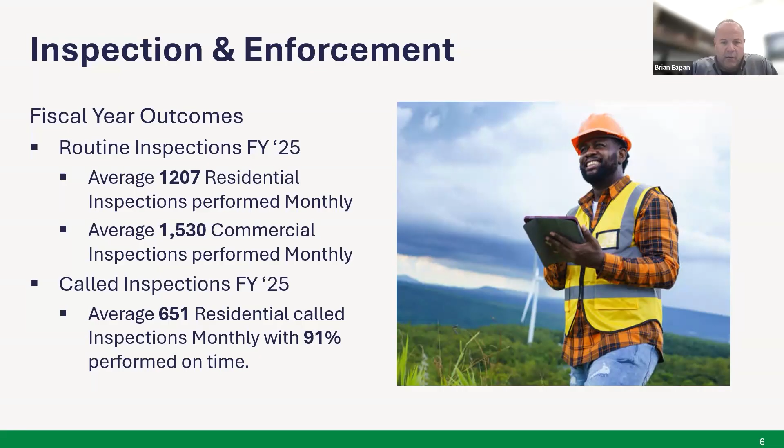We averaged about 651 inspections on the residential side, with 91% of those being performed on time within 72 hours of the call date. Next slide, please.

Same thing for the called inspections on the commercial side. We have a larger team on the commercial side. We're averaging 27 called inspections. You can see it's not as large a volume on the called inspections, so we were able to hit 100% of those on time.

Pre-construction meetings, again, we view that as a priority as well. So we're able to hit 100% of those pre-construction meetings on time, which are performed within 72 hours of the date that inspection's scheduled. Enforcement of non-compliance, I mentioned previously, the enforcement team handles the 311 complaints that come in, all the service requests. We average 117 complaints per month, with 99% of those performed within 24 hours.

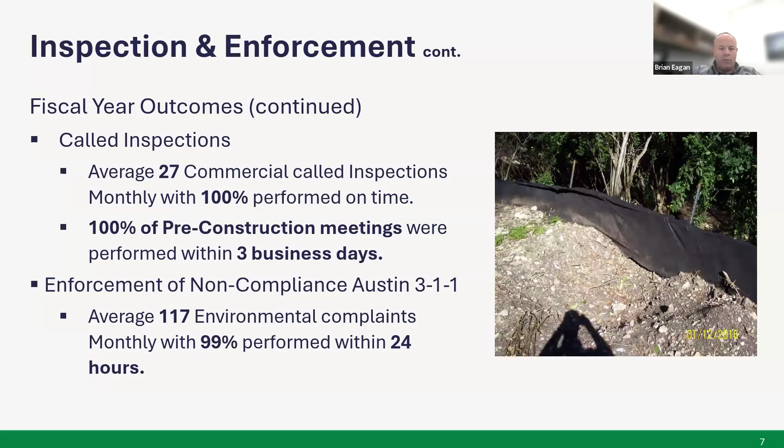That 24 hours is an earmark we have, but I can tell you 99% of those are generally performed where an inspection is conducted with eyes on that site within 2 hours of receiving that complaint. Next slide, please.

As far as community engagement and improvements, our division offers lunch and learns that are open citywide. Some of those topics are enforcement actions. We speak on residential inspections, commercial inspections, and we've also included boat dock inspections. Those lunch and learns are conducted here at the PDC, the Permit Development Center, on Wilhelmina Delco Drive. ESIS can provide that address if you're interested, and a link to those courses later in this series.

We also provide digital and physical literature to stakeholders, including builders, property owners, developers, anyone looking for educational material or who has questions. We conduct meetings and presentations after hours with homeowners associations and neighborhood associations, focusing on environmental inspection processes, compliance, and environmental stewardship. We will come out to your location and meet with property owners at one of their meetings to provide education and hold a question and answer session.

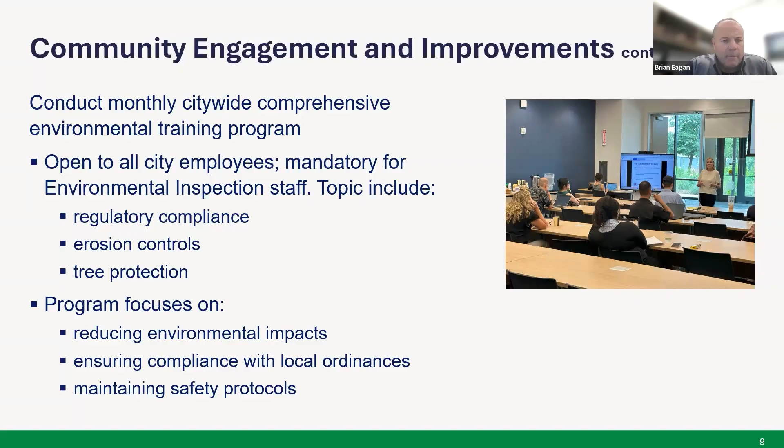So at this time, I'm going to turn this over to Scott Cochran. He's the division manager. He'll introduce himself for residential building inspections. Appreciate everyone's time today. Thank you.

All right, thank you Brian. Hello everybody, thank you for being here. My name is Scott Cochran, I'm the division manager for the residential building inspections group. What I want to do today is run through, and I have a lot to share so bear with me, but get you familiar with the IRC, what it covers, and really basic overall inspection processes and what we're looking for during our inspections. This is a really basic overview. Obviously every job is different, but this gives you a good idea of how everything should work in a flow. Next slide, please.

So we currently operate under the 2024 International Residential Code. That code is developed by the International Code Council. It really outlines the minimum requirements for construction of one and two family dwellings and townhomes as well. Those code cycles are updated every three years, depending on different variables. That doesn't mean we update or adopt a new code every three years, but the codes are updated every three years.

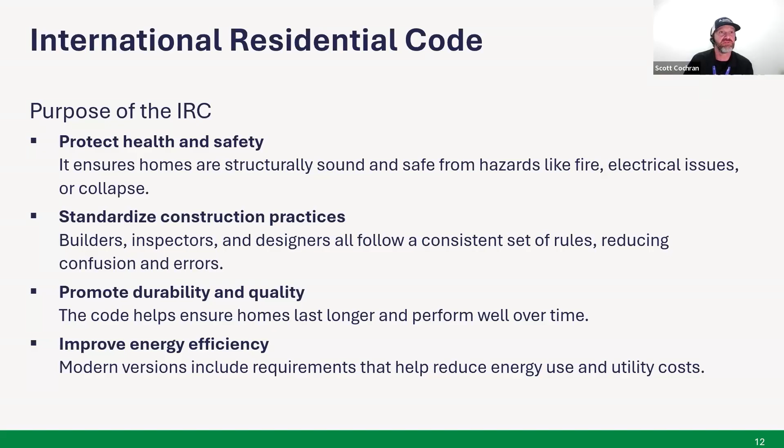So the purpose of the IRC is to protect the health and safety of occupants and future occupants. It's also to help protect our first responders. It ensures homes are structurally sound and safe from hazards like fire, electrical hazards, or collapse. It standardizes construction practices - builders, inspectors, and designers all follow a consistent set of rules, reducing confusion and errors. It promotes durability and quality - the code helps ensure homes last longer and perform well over time. Also, energy efficiency is a big thing - modern versions include requirements that help reduce energy use and utility costs. Next slide, please.

As I mentioned in the first slide, buildings covered under the IRC would be single-family homes, two-family homes - you can call them duplexes - buildings consisting of three or more townhome units, and all buildings within scope of the IRC are limited to three stories above grade plane. Next slide.

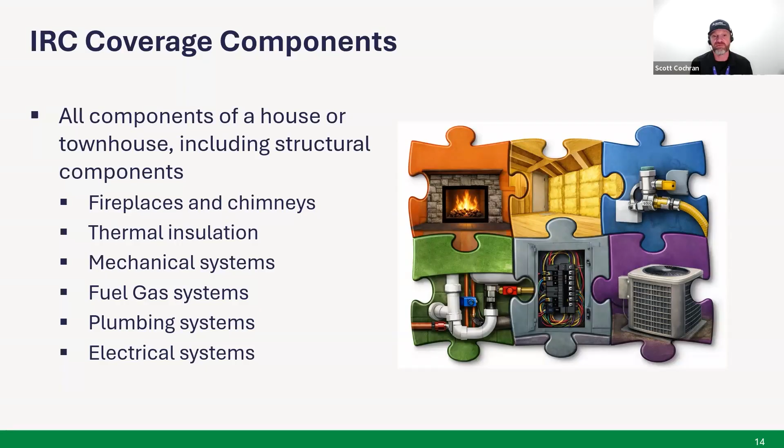The IRC coverage components - there's a lot in the IRC, it's a nice thick book if you've never seen one before. All components of a house or townhome, including structural components. It goes over, in a general sense, fireplaces, chimneys, your building envelope, thermal insulation, mechanical systems, fuel gas systems, plumbing systems, and electrical systems. Basically any and all things in and out that run throughout your house - the heartbeat and the veins. Next slide.

So the purpose of inspections - not everybody likes to pull permits, but there is really good reason to do so. You get an overall view and check of structural integrity, load path and bracing rules, fire-resistance requirements, egress and access requirements for your occupants and first responders. This isn't just for the occupants, it's also for first responders to make sure they have proper openings and stairways tall enough or wide enough for them to be up and down with the building apparatuses. Overall life safety requirements is really key, and that's what we really try to focus on.

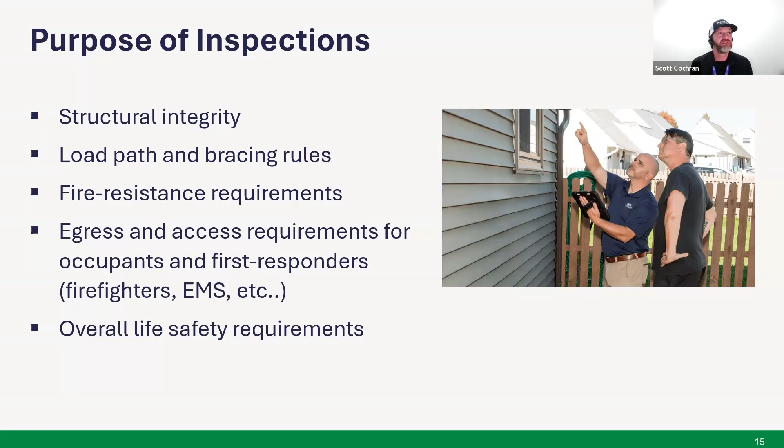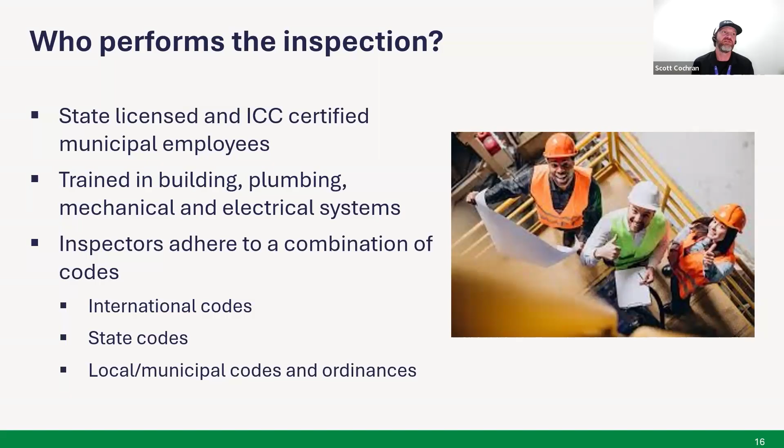So who performs these inspections? When you have an active permit, as far as the city goes, you've got your city inspector who is state licensed in plumbing and other endorsements, but also ICC certified, with the hopes of being a combination inspector certified in building, mechanical, plumbing, energy, and electrical. Inspectors adhere to a combination of codes - international codes, state codes, and local municipal codes and ordinances.

So I wanted to run you through, when it comes to a building permit, a basic overall general sense of the number of inspections there are, but more importantly, what flow they should operate in. One that's not on here, and that's my fault, I didn't add it - the first thing, for the most part, that will occur, especially if you're in an infill area, is going to be a 619 environmental pre-con inspection.

After that, you'll have a layout inspection. At layout, we're going to be identifying that your forms are set. You'll need a form survey uploaded to the building permit. On that survey, we'd like to see setbacks - we want to make sure you're not encroaching into a building line. If there's an overhead power hazard, which a lot of infill lots do have, we'll sometimes ask to get a measurement to make sure that structure's got the proper horizontal clearance from that overhead line. If you're in a floodplain, we want to see the FFE, finished floor elevation, to make sure you're elevated high enough above flood requirements, FEMA requirements.

A foundation inspection - we do not conduct foundation inspections. We depend on a third-party engineer to do those inspections. They'll inspect it prior to pour, and once that's done, they'll upload their letter stating the foundation was poured to code requirements and specifications.

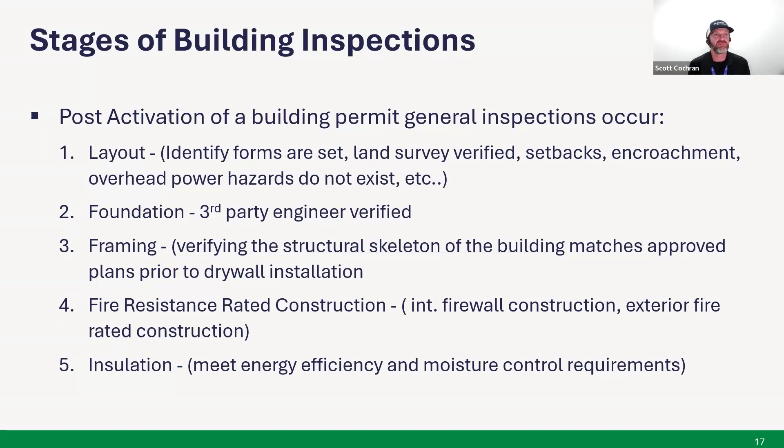So you move on to wallboard after that once you've gotten your approval. For new construction, it's third-party verified. For remodels or additions, more than 128 square feet removed are inspected by a third party or a residential building inspector. So the important thing is, if it's a remodel of 128 square feet or more, you have the option of either hiring a third party or asking the city inspector to schedule your wallboard inspection and do the inspection. However, all new construction is going to be done by a third party, ICC certified, or a certified design professional.

The termite inspection will be next - that's just going to be a third party. Your termite treatment company will essentially give you a HUD 99B form or a State of Texas wood destroying form. They'll fill that out and give it to you or the builder, which then needs to be uploaded to the building permit. We'll verify that all the areas of the home were treated, the address matches, and it's a real quick paperwork inspection. We'll verify everything matches and pass that inspection. Then you're on the final building.

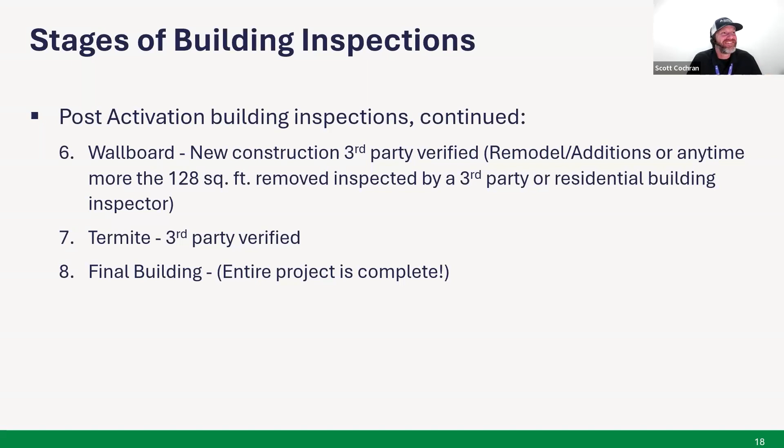Stages of mechanical inspection, specific to mechanical permits only. Basic overview: if this was a new construction permit, there's really only two things we're looking at. Mechanical rough inspection is done with the framing, covering HVAC and ventilation systems before they're concealed. We're looking at the ductwork, making sure R values are correct, your vent hood if installed already, and your exhaust ducts for utility rooms and bathrooms, making sure they terminate to the outdoors. All minimum code requirement things.

And then a mechanical final, we'll see you again for a grouped mechanical final, building final, plumbing final, and final energy. HVAC and ventilation systems fully installed, operational, and safe prior to occupancy.

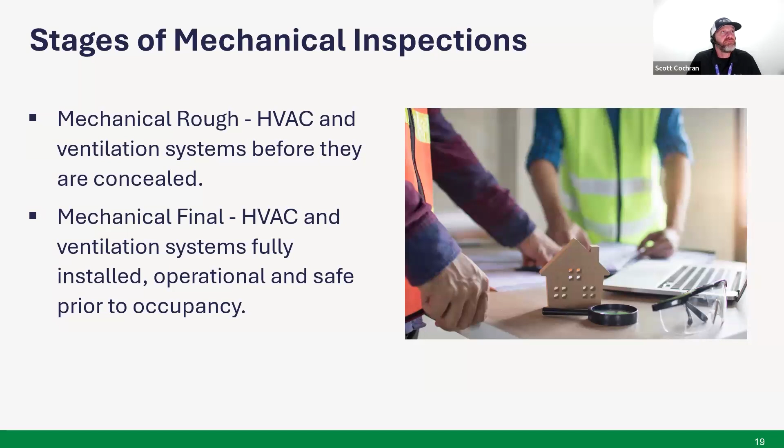Specific to plumbing permits, throughout the construction process we're going to do a plumbing rough inspection. That's verifying your drain, waste, and vent systems are installed prior to concrete, to code. Plumbing pre-pour as well, drain, waste, and vent, we're looking at that again. They should be on test along with your water supply lines, and we're going to make sure those are all installed prior to placement of concrete.

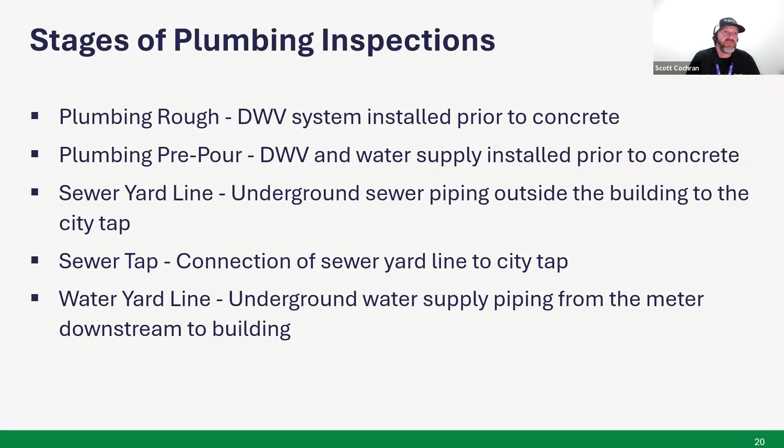Sewer yard line inspection, that's your underground sewer line that will connect to the city tap. Sewer tap as well, we'll be looking to make sure that sewer yard line is connected to the city tap properly. And then your water yard line inspection, that's your underground water supply line coming from Austin Water's meter up to the building. Make sure it has proper depth and the installments are essentially to code. There's a few different variables that go into that.

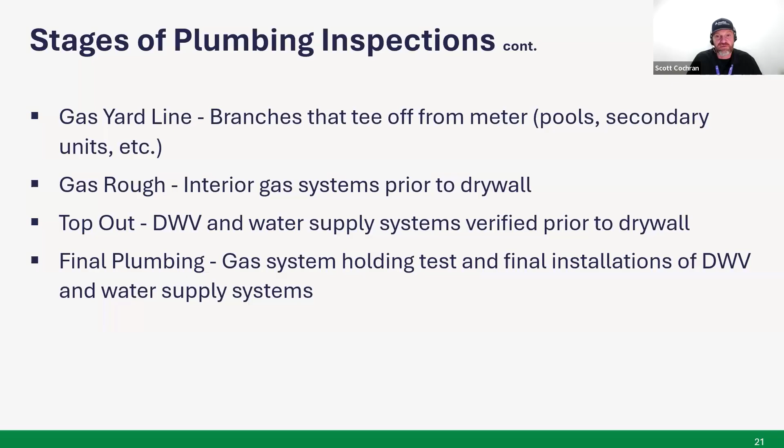And then in final plumbing, we're looking at your gas systems holding the test, and we're looking at all your interior installations being to code, such as your P-traps, and you have hammer arresters for your washing machine. There's a lot that goes into it, but just a basic overall sense that everything is holding and it's safe for occupancy.

Stages of electrical inspections. Actual electrical slab is your underground conduit, so anything ran underground. Electrical grounding is the grounding electrical system installed safely prior to concrete. Your electrical rough is going to happen before your frame group inspection, and that's essentially looking at electrical systems installed in the walls, ceilings, and floors, anything prior to concealment.

And then we're going to see you again at final electric, making sure the system is complete, safe, and the building is safe for occupancy at that point.

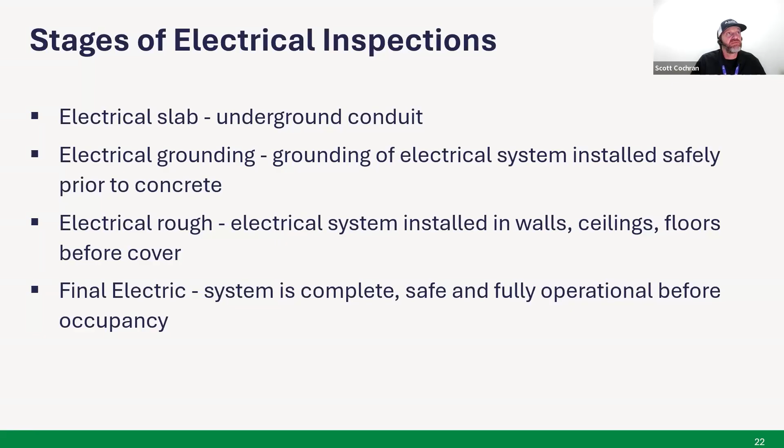The Building Criteria Manual online is another great resource to utilize. You can do a quick search engine, Google, Bing, whatever you want to do, and type in City of Austin Building Criteria Manual—probably one of the first one or two links that pop up. If you go to section 4.6.0, that'll give you a really good sense of inspections from start to finish, including what they look like and what content we're looking for.

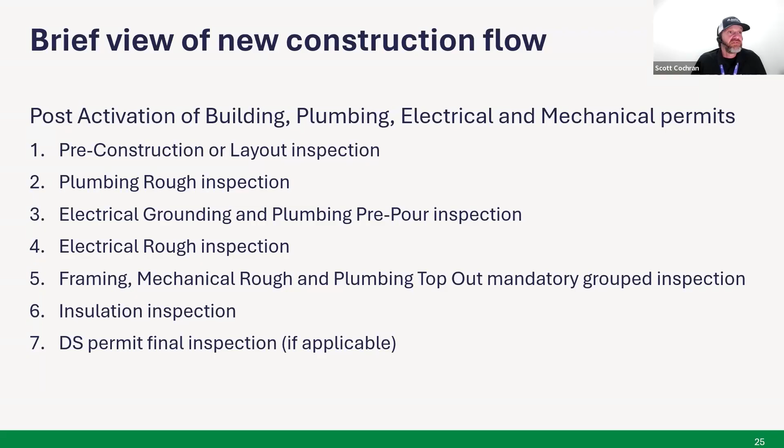Once the DS permit has passed its final, the final electrical inspection has been done. There are one-time inspections: if it's new construction, most likely you're going to have a 611 water tap. You can find that information on your permit, listed under one-time inspections. If applicable, there may also be an Austin Water or an AFD fire inspection—whether it be a WUI or a final sprinkler inspection—and of course your final environmental inspections.

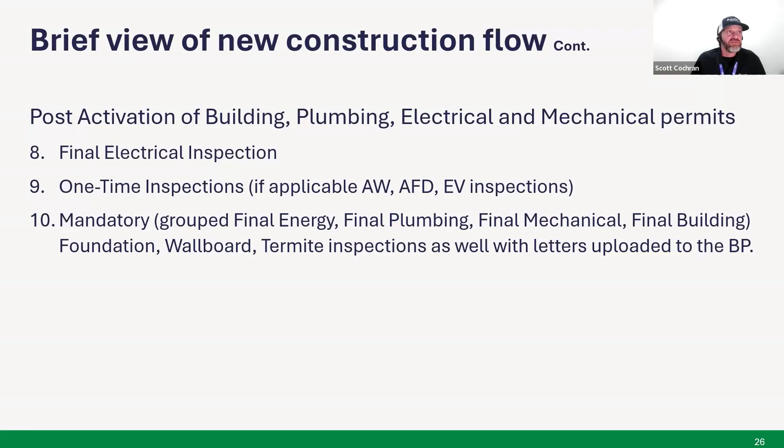Once all of that is done, we'll do a mandatory grouped inspection at final: final energy, final plumbing, final mechanical, and final building. And if you haven't done so already, you'll schedule your foundation, wallboard, and termite inspections along with it—just make sure those applicable letters are uploaded to the building permit.

Just some real quick common failure items I wanted to share—some top 10 things we see. Addresses not posted on site: if we pull up and don't see an address on a building, whether spray painted on the foundation or marked some other way, we don't know we may exactly be at the right place. So that's actually grounds for a failure.

Also, city approved plans on site. One common thing we see is if it doesn't have our city approved stamp on it—whether the original stamp or a photocopied stamp—we technically don't have the proper documents to conduct the inspection. A lot of what we see is non-approved architectural prints being there; those may be the same set that are approved, but if they don't have the stamp on them, we simply can't do the inspection.

No access—so no code, no lockbox code left for us. There were no instructions left online as far as the lockbox code, where to enter, who to call, and so on. Also, deficiencies previously noted not corrected prior to rescheduling.

If there's a list of 6 or 7 deficiencies, it's not uncommon for us to show back up. I'm not sure if the job's not getting walked before it's rescheduled. Who knows? There could be a number of different variables. But it's always important to try to get the subcontractors to correct those items before calling the reinspection back in.

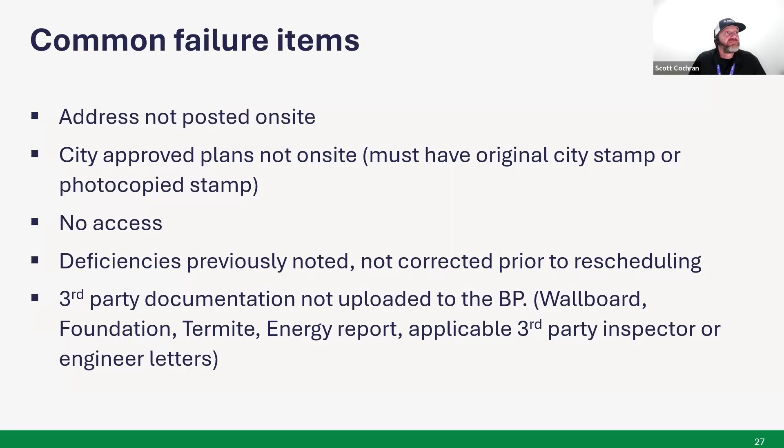Prerequisite partner department inspections not passed. For example, if you're in a WUI area, new construction, before your frame group inspection can take place, you're required to have your initial WUI inspection done by Austin Fire Department. Similarly, at final, you're required to also have your fire final done prior to scheduling your final inspections. Same thing applies for environmental and Austin Water. So just be cognizant of your prerequisite inspections, and if you're not familiar with what those are, visit our flow chart online.

Grouped inspections not scheduled correctly. If it's a group final, there could be a prerequisite Austin Water inspection that hasn't been done yet. That is going to prevent you from scheduling your building final, but you're allowed to schedule everything else systematically. If we don't see them scheduled together, it's most likely going to be an automatic fail.

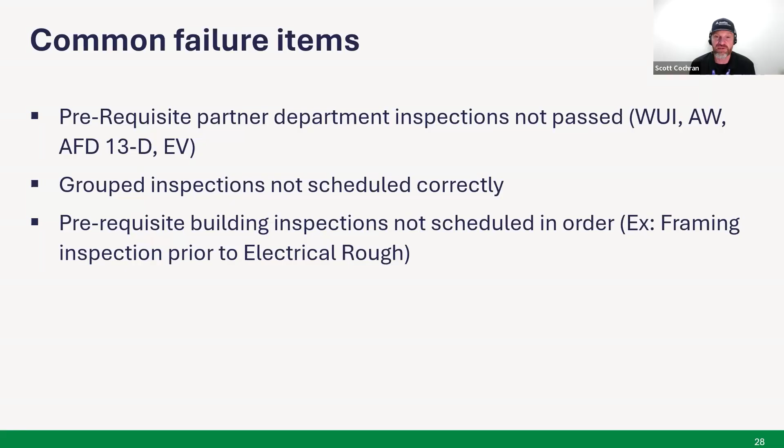Prerequisite building inspections not scheduled in order. That would just be trying to schedule your frame group before your electrical rough is passed. Everything needs to occur in steps. It just helps the overall process go smoother. Again, if you're not familiar with those steps, visit our website online. We have a flow chart that'll help you navigate.

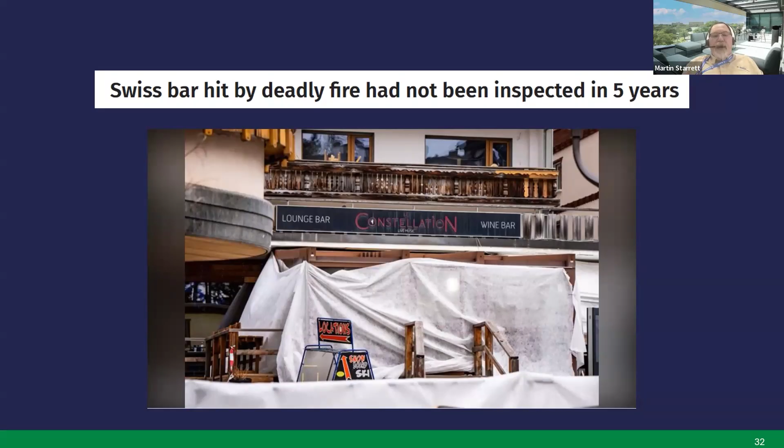So how can inspections protect property owners and contractors? This is a good example. I don't know if you remember the fire New Year's Eve in Switzerland, where several people were killed and injured through that fire. This particular owner here, now he's going to be in court, and the building official is going to come to court and say, no, he did all that work without inspections. Or if you had an inspection, we could go to court and say yes, everything was installed to minimum code. So that's the way we can help the owner for their particular structures.

Similar to what Scott said, commercial inspections pretty much have the same flow as far as inspections are concerned. The very first one you have to have in commercial is the building pre-con. You cannot schedule a mechanical, plumbing, electrical, or any other building inspection until that initial pre-construction meeting is held.

Usually what you want to do during that pre-con with the building inspector is talk about upcoming inspections, what inspections would be needed. I want to note that not all processes on the inspections are needed.

It depends on each project, but typically you're going to have a foundation and footing inspection, framing and structural inspection, insulation and energy efficiency checks, drywall and interior inspections, and then your MEP inspections—that's mechanical, electrical, and plumbing. Those will be done by the trade inspectors, and then the one-time inspections, I'll talk about those in a minute. Then after all those are done, you'll have your final inspection and certificate of occupancy.

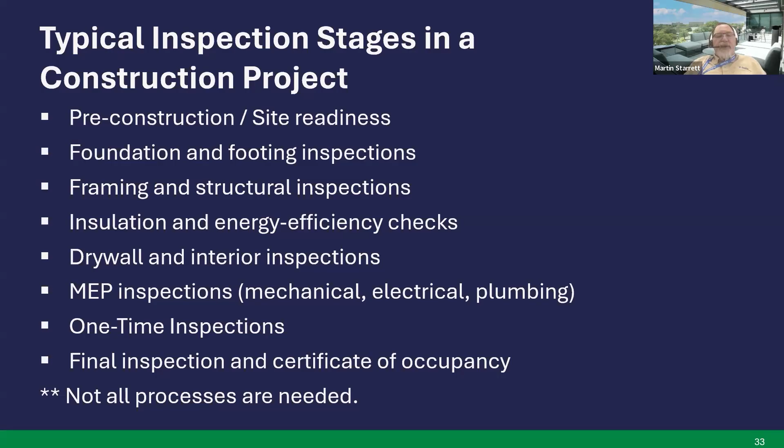As Scott mentioned, on the residential side it's the same—we have a lot of resources available on the building inspections webpage. As shown for residential, same with commercial: we have commercial process flow charts and even some commercial inspection checklists, and also our inspector phone list is found on that page. So the flow chart is a good resource to determine what inspection you might need.

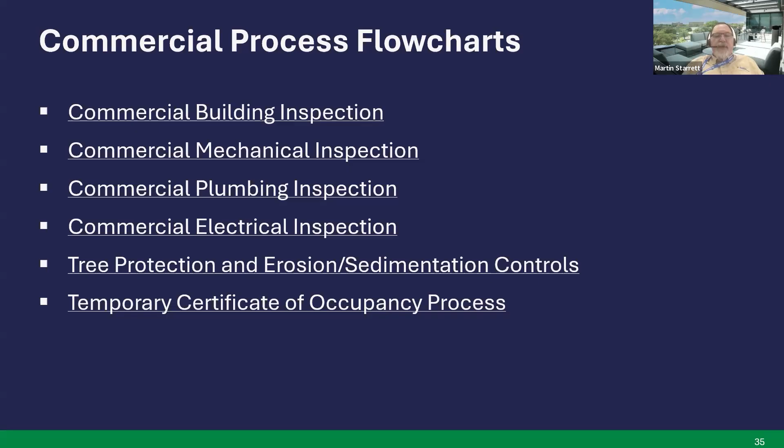Here are some examples: we have the commercial building inspection, mechanical, plumbing, electrical inspection flow chart. There's also the tree protection, erosion, sediment control flow chart, and then the temporary certificate of occupancy process flow charts. These are all valuable resources.

So for instance, if you looked at the commercial building process, it shows the framing and interior inspections, and then it shows the WUI needed to be done before any of the framing inspections. Like Scott mentioned, similar in residential, if you're in a WUI area, that would go first. As far as commercial building is concerned, our framing inspections are done with third-party letters, and a lot of those letters have to be due during the final inspection. That's one of the issues we sometimes have with the final.

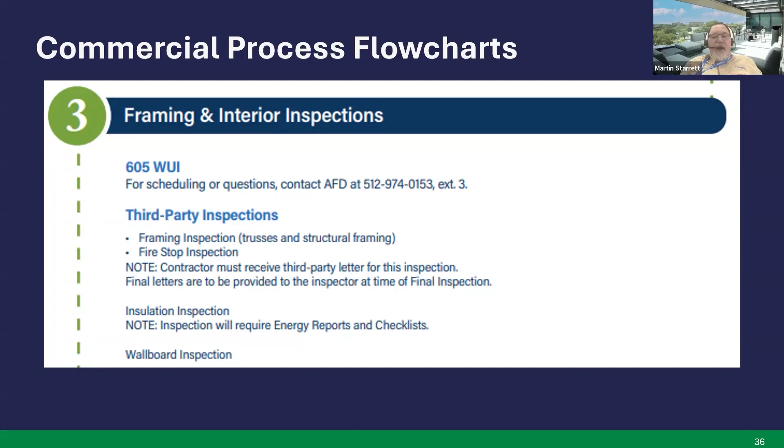The one-time inspections: in commercial building inspections, we're only doing the building, plumbing, mechanical, and electrical inspection. But there are other departments that are part of the development process that you have to have inspections from before you can move forward, say for your final inspection, your final CO.

So some of these inspections are not part of us with building inspections, like fire, health, et cetera. These one-time inspections will need to be performed before you can actually schedule your building final. Typically, you go with the mechanical, electrical, and plumbing, then you go to your one-time inspections, and then go to your building final.

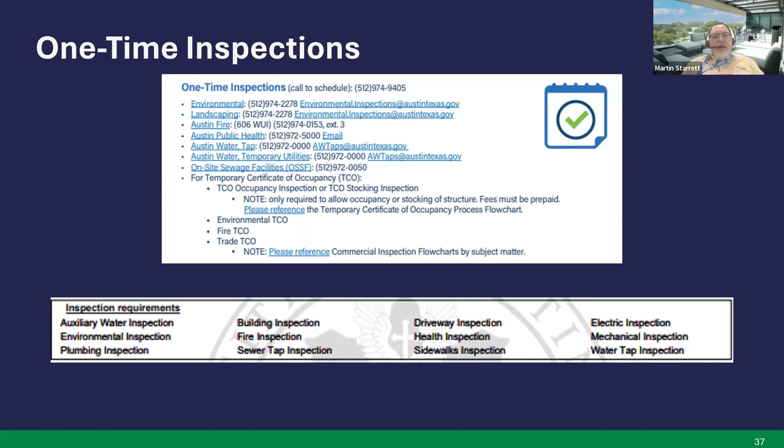Also, another issue that may hold up a building final is administrative holds. These are also listed on your printed-out building permit. Most of the time, I'd say 90%, these are for deferred submittals. Now, a deferred submittal requires a plan review revision—just remember you'll have to submit that deferred submittal as a revision to plan review before that hold can be released.

Once all the administrative holds are released, and all the other one-time inspections are done, then you can schedule your building final. Note that not all building permits have administrative holds, but some do, and some are for things like green building, affordable housing. Any of those holds would have to be released. You also need to be aware of an SSI hold—us at building inspections, we cannot see that hold, but if you go to schedule your final, you may get that error message, and you'll have to contact them to get it cleared up.

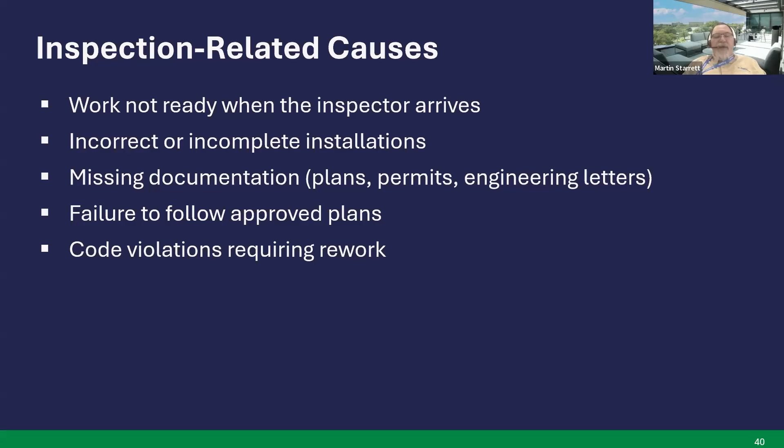Similar to what Scott said on residential—work not ready when the inspector arrives—I'll say on the commercial side, this is the number one deficiency across all of my teams: mechanical, electrical, plumbing, and building. The work's just not ready, it's either incorrect or incomplete. Again, missing documentation, failure to follow approved plans, and code violations requiring rework.

We have this as another resource: top 10 tips for successful inspections, available on the building inspections page. Again, Scott went over some similar points for residential, but this applies inspection-wide.

Verify work is complete before the scheduled inspection. Like I said, the number one deficiency with commercial is work not ready. It's pretty obvious sometimes when the electrical inspector walks into a building and there's cables and boxes open, and it's like it hasn't even been checked before the inspection was scheduled.

Verify all deficiencies have been corrected. Your inspector, if you happen to get a fail, should be emailing you a deficiency report. That report should help you clear up any of those deficiencies. Now, sometimes there is a possibility that as you're clearing a deficiency, you might create another one. That happens occasionally, but just remember, we're going by minimum code. So if you've got a deficiency, you're not even meeting minimum code.

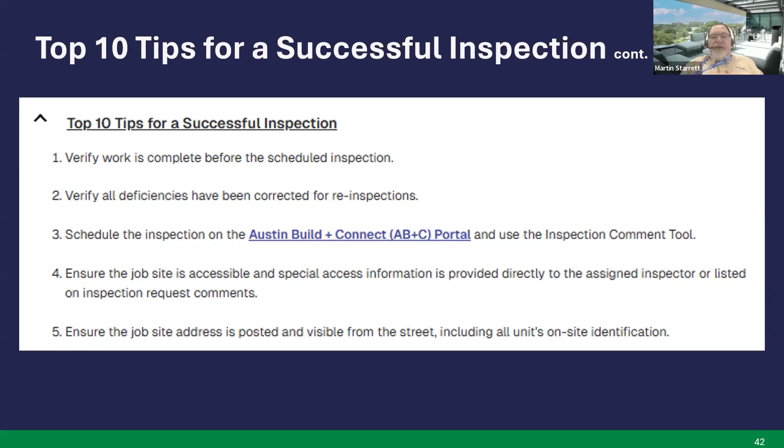I put this as an example that happened to me as an electrical inspector. The address was North Plaza, Building 16. There was no comments in the inspection comments. So here I am riding around an apartment complex, and typically apartment complexes have a way in and a way out, two entrances, two exits. But this particular complex has an additional one. So I rode around that apartment for 20 minutes, then I had to fail it and go. I don't have that much time.

But if whoever scheduled the inspection would have put 'use the south entrance' or 'please call me if you're having difficulty finding the property,' I would have called. But we are only limited to the amount of time that we can go to a project to do an inspection, because we have so many. So the more information you put on those inspection comments, the better.

Of course, like Scott said, similar, ensure that the latest city-approved plans are accessible for inspection staff. Those should be available on site. Ensure all required documentation is uploaded to the permit. If you're required to have a third-party report on the permit, it needs to be uploaded before the inspection.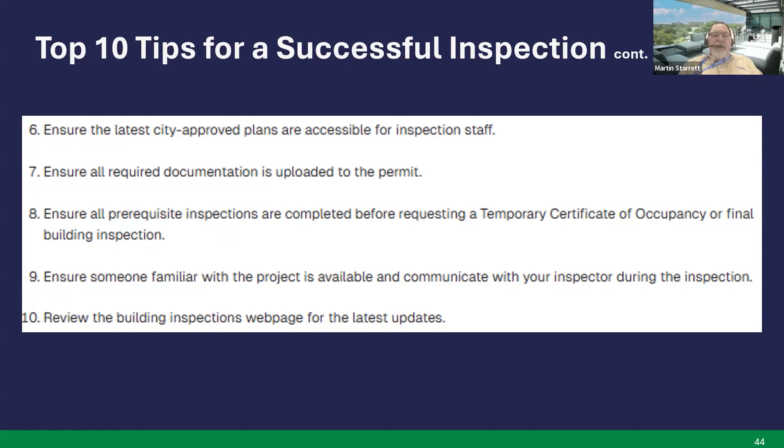Review the building inspections webpage for the latest updates. That's a good suggestion. Matter of fact, like today, if you looked on the webpage, it would probably say that inspections may be delayed while staff attend training. So we always put updates on our building page to let you know that, hey, we've got some inspectors in training today, so you might be delayed.